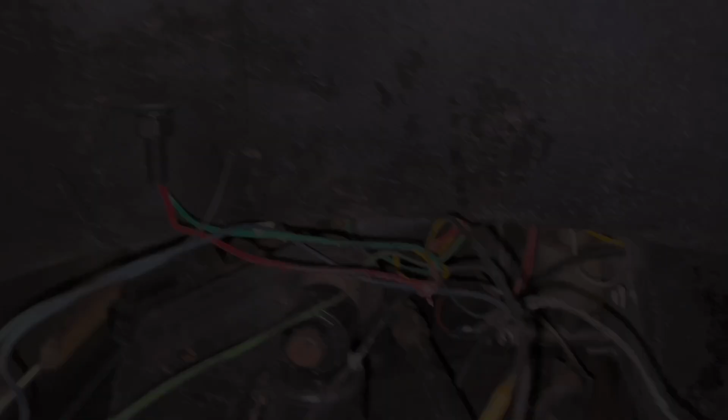So it's Monday. I figured I'd show y'all this. I'm sticking this, just hooking this up to make sure they got everything ran the direction or wherever they need it to.

This right here was wrapped all up around the steering shaft, as you can tell. So when that rubber spins, it pulls on this and tears it and unhooks it. Or hey, the other end of that's not even hooked up.

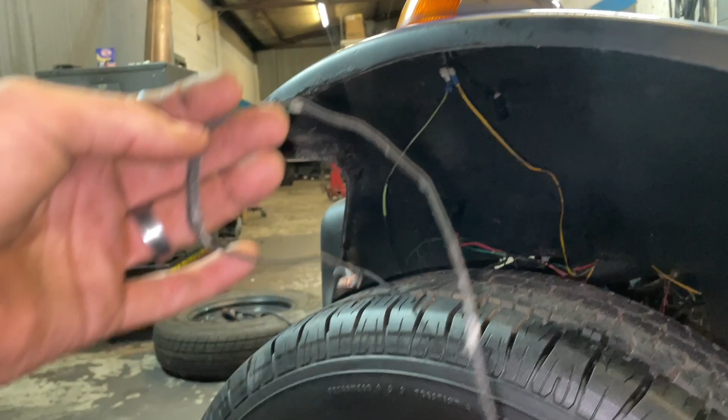Going through trying to figure out what is what before I make a plan to straighten out all that mess. I'm not even gonna cuss about it. It is what it is. Let's get this thing checked out, see if we can't get the lights to work, and then I'll know what to do from there.

Alright, before I even get up in here and look at this, let's look at this one right here. Look, these wires are mangled. There's pinched on the body. I'm sure that'd blow a fuse.

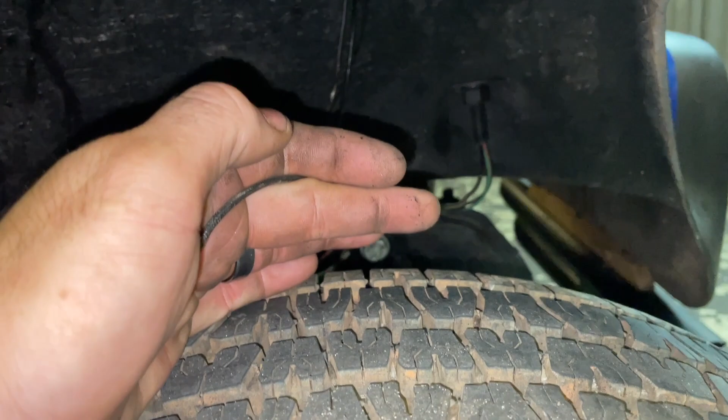Then I see there's 3 wires coming out here, only 2 wires on the other side, and this one is a ground wire right here. So that tells me on the other side we're missing a wire, so we're going to have to figure out what happened and why the other side ain't got a ground on. That could be the issue why the headlights stopped working. We lost our ground wire, so let's check it.

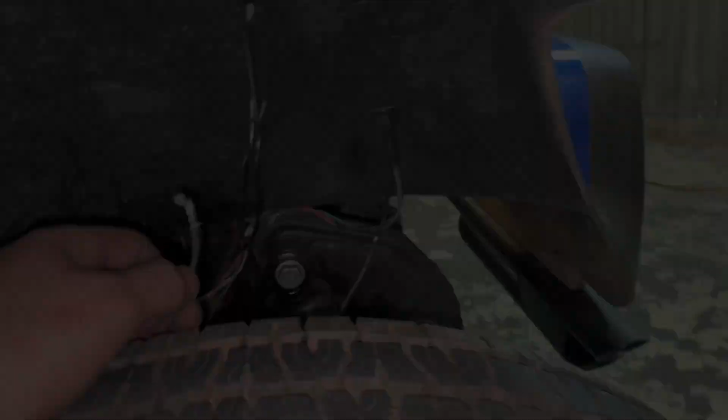I just pulled this bulb straight out, and this is what it looked like. So I'd say we lost the wire. That's one issue, and it wasn't plugged up.

Sorry if there's wind noise. It's hot here in North Carolina, so we're gonna have to deal with it.

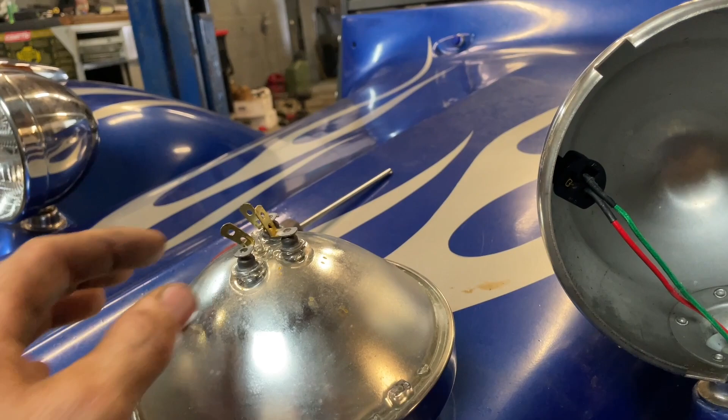I'm gonna straighten these prongs out, get that plugged back up, get a ground wire on it. See if we can get the lights working, and if we get them working like it's supposed to, then I can clean up, tuck, and get everything straightened out. I'll rewire the gauges and all that, but if I don't have to run new wire, if I can just clean up the stuff, then that's what I'll do.

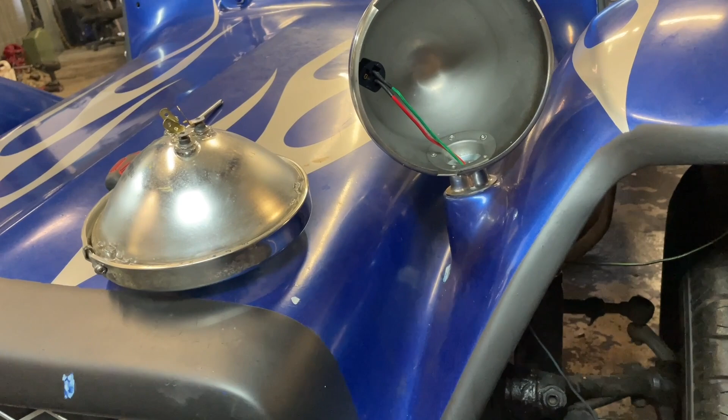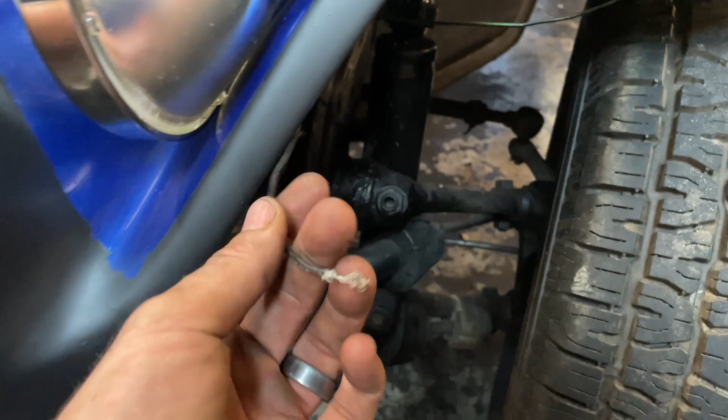Alright, now I got the prongs back straight, got the ground wire hooked up. It ain't wired up out here, it's just stuck in here for now. We're gonna turn the headlights on, ground it, and test to make sure we got our headlights like we're supposed to, high and low beam. Then we can go from there.

Right here next, I'm getting to tack something together. I had Jake tacked together earlier and I had it wrong, so I'm gonna get Nick to tack it so I can finish cutting this piece up so I can get something built.

Alright guys, so this is what we come up with. I got Nick to retack it. I had Jake tack it together earlier, and it was just out of my head with a coat hanger. I had it way off, too many 45s, too many 90s on it. So I had it all messed up.

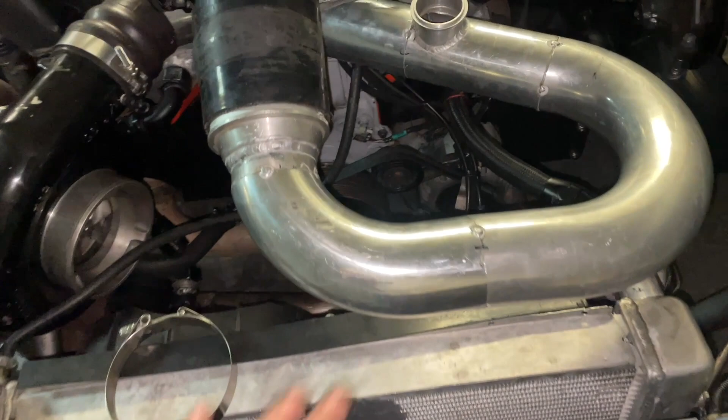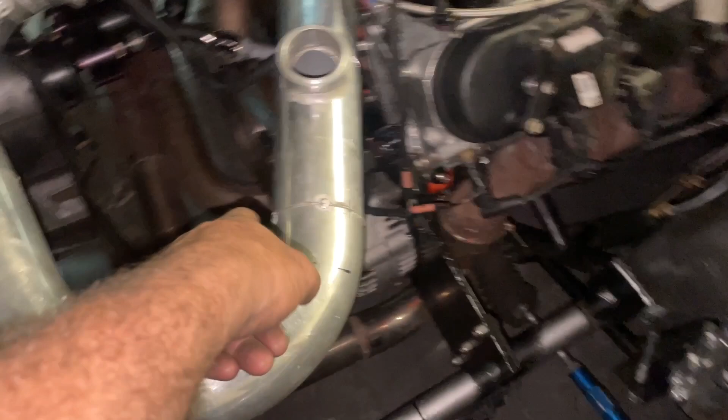So I come over here, I took everything apart, marked it. I took it down to Nick's because he's closer to me than Nigel's, and he was there tonight. So I had him tack here and here. Then I come back over here, and while I was there, I went ahead and cut this piece. Then I took it, went back down there, and added this piece in right there.

And I got this thing where it don't look too bad. It ain't too ugly. I mean, it ain't what I want. Initially, all I ever wanted was this to come up to here when I built the turbo kit.

But the problem was, I didn't take into consideration the overhang because my intake was flipped around backwards. So I always pictured, I said, well hell, I'll just run a little intake tube from here to there, and this thing right here will be fine. Oh well. So I built all this, so I'm gonna take it all back apart.

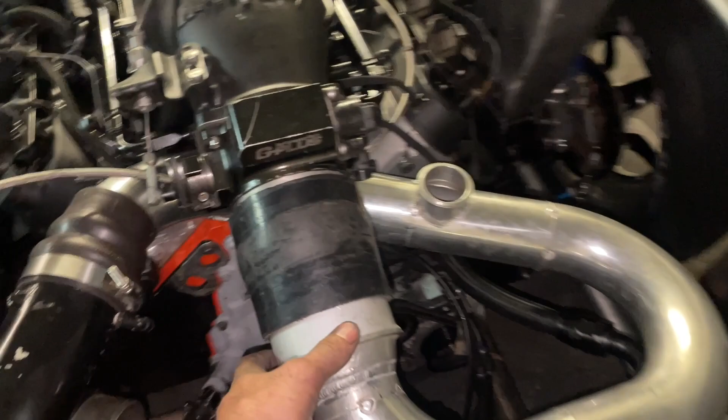I'm gonna take it to Nigel's tomorrow. I'm gonna bead roll this, I'm gonna bead roll that, and I'm gonna get Jake to weld it together and put me an IAT sensor on it, and then we'll be ready to test this thing out, put some fluid in it, and we'll be good to go.

So Nigel's over here balling. Look at him, got him some new equipment.

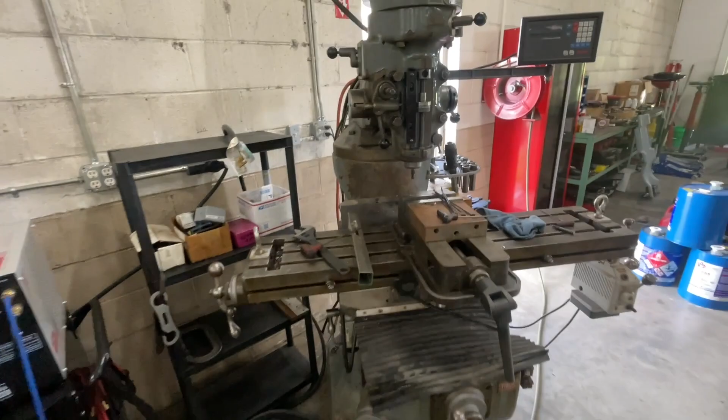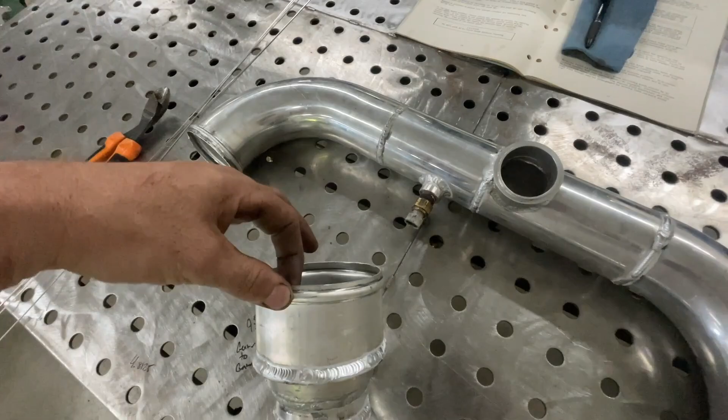Jake welded this thing up for me. Got my bung, put my ball valve on it, got everything welded up. Let's try this thing out tonight.

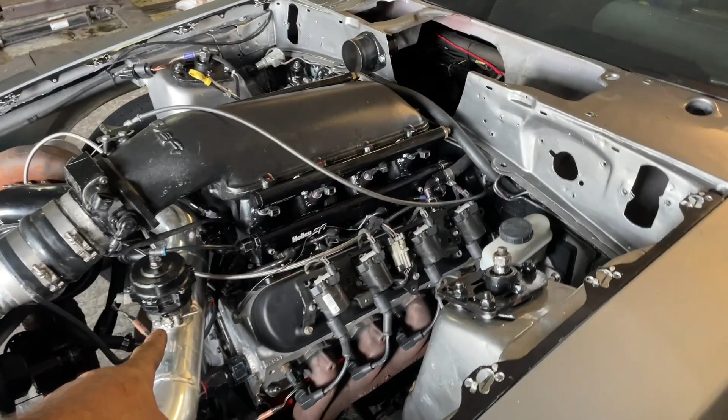Alright, well I got it up on here, stuck on here for now. Put the ball valve up. I ran a new piece of vacuum line to feed this.

The throttle position's way too tight. I'm gonna have to extend it because I had ripped the wires out and shortened it at one time, but this will be just for pulling outside, testing it. I'm gonna fire it up, put some trans fluid in, and move it around.

I need to go ahead and zip tie this. I'm going to zip tie that up, that way it can't get pulled into the turbo.

Hold on one second. Alright, well I got that zip tied up, which I'm gonna do something different right here. The air intake ain't gonna be able to go out the center of the hood because this is here now, so we're gonna have to go through and sell that hood, buy a different hood, and then figure out what kind of inlet I want on it. I might put one right here beside.

I might come up just tight and not be on center. I might be off center on the next one. Might not put one on. I might just put a turbo guard over that one and do that.

So let's fire this thing up, pull it outside, put 2 quarts of fluid in it. I'm gonna crank it up, see if it turns around and if it'll move, and then if I need more fluid, go from there.

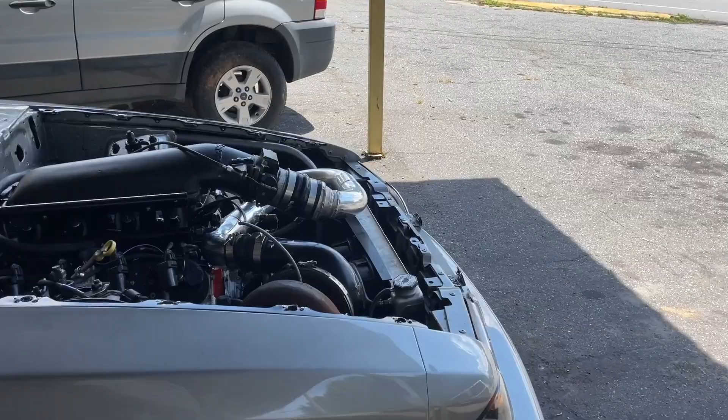So 2 quarts, it looks like it filled it up on the stick. Let's fire this thing up and see what it sounds like. Let's pull this thing up and see what it sounds like.

Alright, the first one was a little lean, so I let it cool down. Now I've gone through and made some changes. We're gonna fire it up and see what it does.

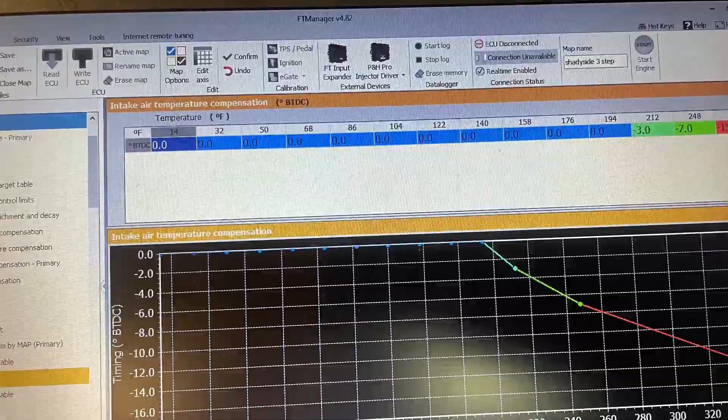So I added a little bit more timing on the brake. I'm gonna see how it helps it. It seems that every time I add a little bit more timing, it seems to help. So we're gonna see what it likes right here.

I'm gonna let it get warmed up. I like to let it get about 150 degrees before I even start beating on it or anything. So let's get it warmed up. I'm gonna let the motor get some good heat in them.

This is without 3-step, guys.

So we're making progress on this thing. I'm gonna go through, go home, hang out for a little bit, and I'm probably gonna come back down here. I'm thinking about polishing this pipe on out.

Kind of like my old pipe, it turned out looking pretty good. What do you think, Caden? You like my pipe like that? It's good. Caden likes my pipe, y'all.

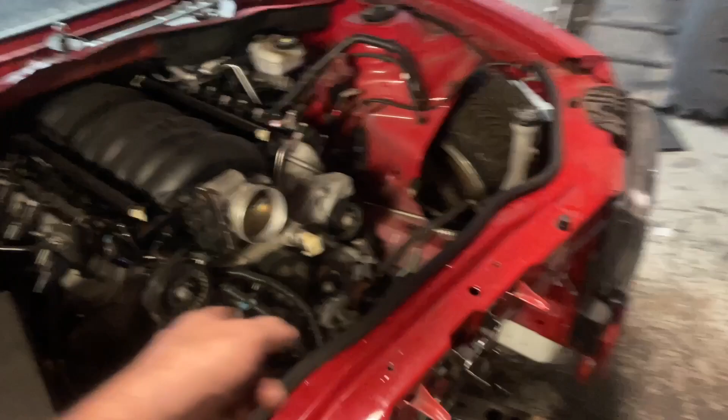Ha! Check out this thing right here. Oh, Josh's ZL1, look how dirty this thing is. It's been sitting since, I think, 2018. It spun a bearing, so he put a built motor in it, built LS3, forged, K1, everything.

I put the balancer on it, getting rid of the supercharger. He's got, I think, a 91mm turbo to go on it. But Nigel's gonna build the turbo kit.

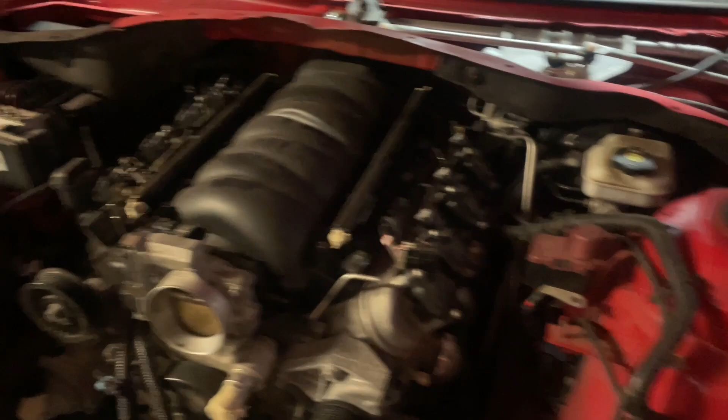So I'm gonna get the wiring harness done. Since he did the grading on my property over there, I'm gonna finish getting all the lines hooked up, get the coil hooked up, get the intake on it, get the thing up and running, get it to Nigel, let Nigel build a nice turbo kit for it.

Y'all check out the interior on this car though. Check out this thing, these things are nice. Look at the way everything's stitched, it's just dirty from sitting. This thing still smells new inside of it.

She's gonna be sweet. Ready for this thing to get back together. We're gonna pull the meth kit off of it. Got a triple pump setup for the gas tank. Got to run AN lines for it.

Like I said, we're gonna get this old girl back out and get her to the track, get her running. He's got a Black Magic, one of the slipper clutches in it, a real nice clutch. So it's gonna be a pretty bad little ride.

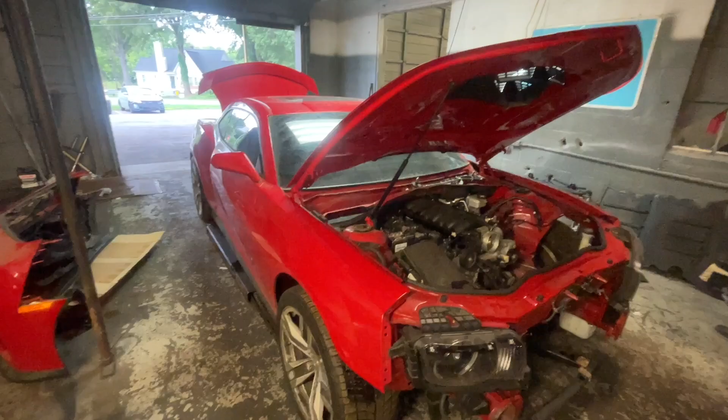So we're gonna get this thing together. I think it's got 1650 injectors if I'm not mistaken. So we'll get this thing done here for him here soon.